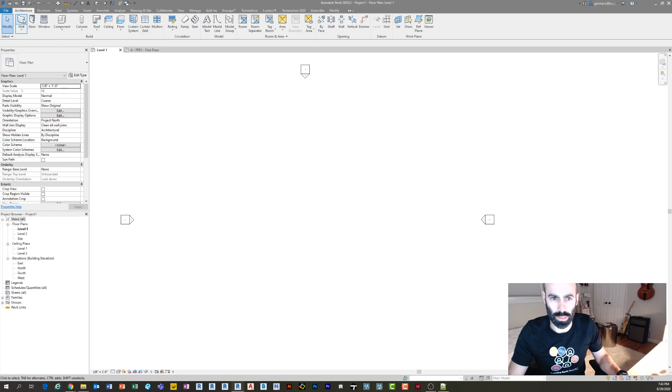I like that question because it brings up a couple other things I can show you guys. For those who have never dealt with corners on curtain walls, this is a cool little tutorial. So I'll quickly go to a default project and click storefront to draw a storefront.

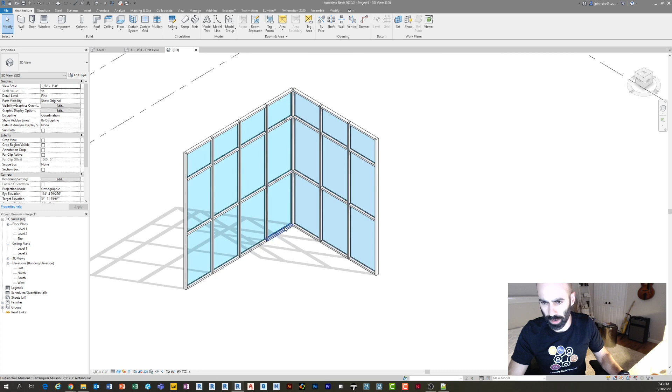Okay, this is a storefront curtain wall right here. If I go in 3D, ta-da! Oh, I have this project with a whole bunch of levels - somebody else asked that question earlier, maybe I'll answer it again here. I'm also going to turn on some view stuff so it looks a little better. Okay, so here's our curtain wall.

Before I jump into the butt glazing, for those who don't know how to put a corner mullion on a curtain wall, here's a great tip. I'll just tab and select one mullion - it doesn't have to be both walls, just one mullion on the corner.

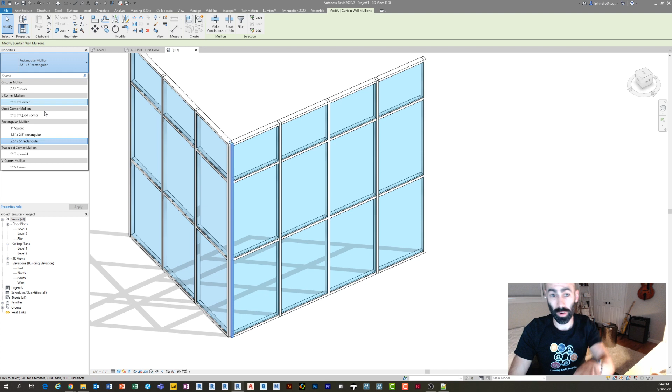Then I right click and say select mullions on the grid line, so now it's selected all the mullions on that curtain wall on that grid line. I'll unpin them by typing UP on my keyboard, then pull down, and you'll notice these things called corner mullions. If you don't have corner mullions, the person who made your template stripped them out, and you have to load them in, which is a bit of a pain. You can see the trapezoid corner mullion, the V corner mullion, and the quad corner - a couple different corner mullions.

If I just do a 5x5, you'll see I get an error in the corner, which you can't see - there it is. Corner mullion overlaps, delete elements. So it's actually going to delete the other mullions and leave just a corner. Say delete elements, and you got yourself a really nice looking corner there.

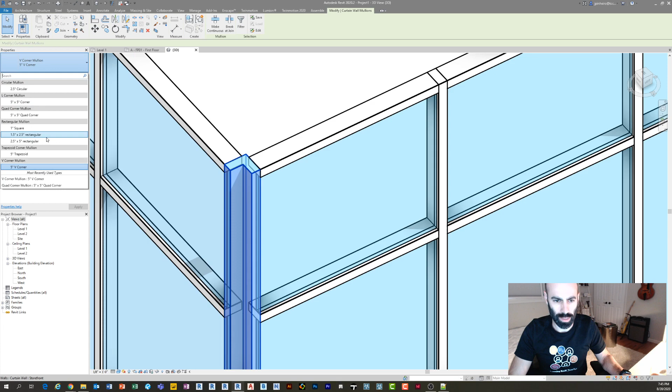If you had a corner mullion, not the butt glazing you're talking about, that's how you'd do it. We could look at some of the other corners so you can get a sense of what they are. I'll select mullions on grid line and do the V corner - the V corner is this guy, and of course I need to select them all. Select mullions on grid line, and a trapezoid corner - look at that thing, that's lovely. Oof, that's a heck of a detail, huh? Yuck.

Okay, so now let's just say we have butt glazing as the question I believe is asking. So I'm going to select all of these, and I'm going to press delete.

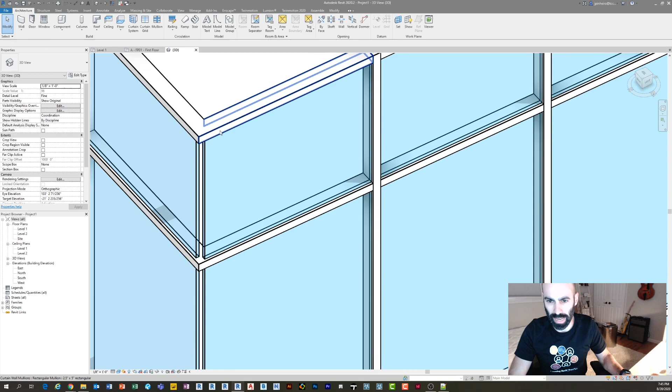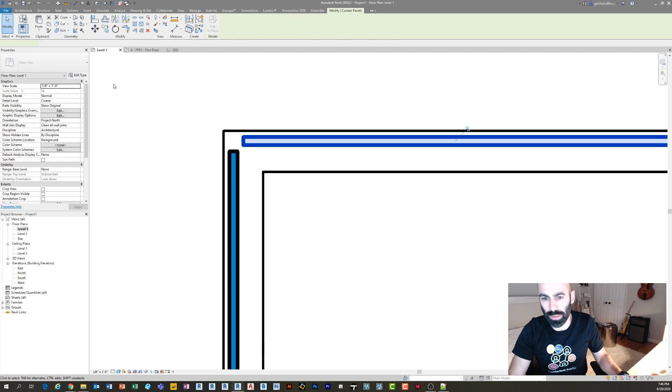So curtain walls, and most walls, but curtain walls especially, clean up using the centers, using the grips that you pull. And so if your curtain glazing is offset, guess what? It's not going to clean up in the middle. So what you need to do is have a type, whether it's the default type or one that you modify, and turn off the offset or modify it.

See how the offset is 1 1/4 inches? If I set it to 0 and click OK, now you can see I'm getting closer. It's not perfect, so if I really wanted to make it perfect, I can dimension here and say my glass is an inch thick, so maybe I want a 1/2 inch offset. There we go. Or vice versa, maybe you want it to be overlapping, whatever, but you get the idea. So I think that probably would be pretty helpful for you. That may be what you're running into, but just a little something there.

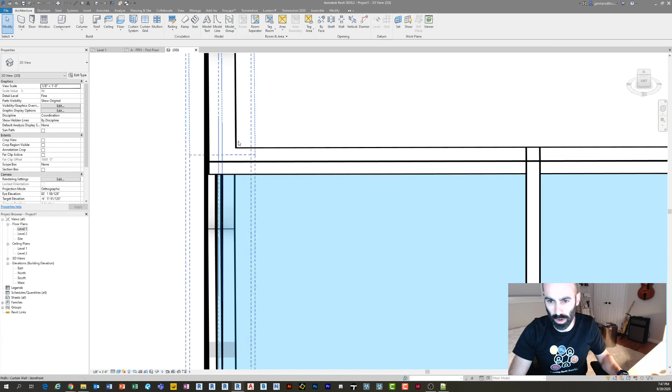And notice how these are cleaning up fine. So if you're using the right mullion types or your default profiles, you shouldn't have any problems with those cleaning up.

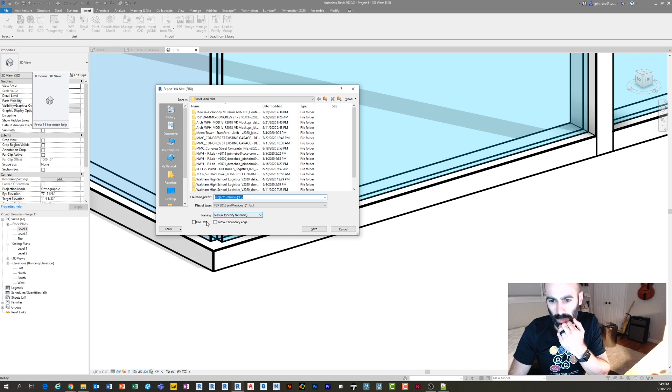The other one works if you go under File, Export - you can see you could do FBX here, and the Autodesk one works, and there are some settings. If you use LOD it kind of helps that out and stuff. But to be completely honest with you, the Twinmotion one, which you can technically install for free even if you don't have Twinmotion, is super simple, but produces some quality stuff coming out of it, and the optimized model.

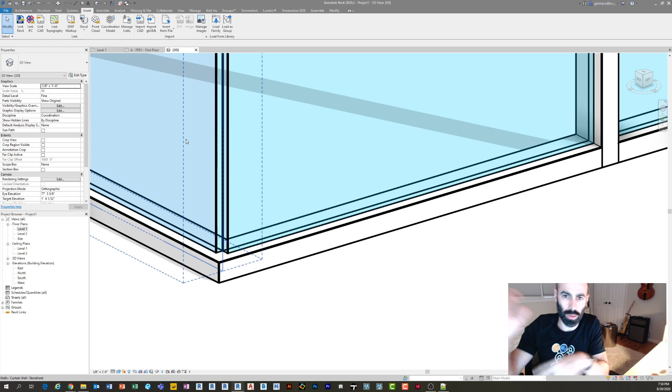Not for every model, I would suggest you check the geometry afterwards. But their optimized model export can greatly reduce the complexity of the geometry, and usually you don't lose a ton of the geometry that you need. So as far as importing, I don't even know if I've ever imported an FBX, to be honest with you. Going back to the Rhino question, if you're not using Rhino inside, the only way to get a .3dm file in is if you go to Import CAD and change it from DWG to .3dm. You can see you can actually change the category and whatnot.

And I do know that there are some best practices people might have for bringing it into an actual family instead. So whether it's a family object outside or whether it's an in-place mass or something like that, there are advantages to that.

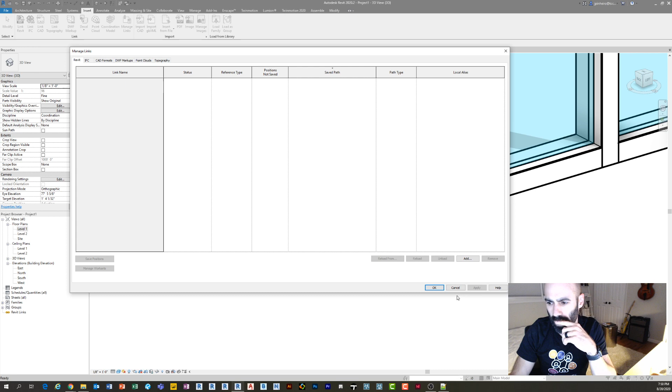I don't even know if I've ever brought in an FBX to Revit. I've got to be honest with you. So if anyone has done it before, let me know. I'm not really sure I ever ran into that. I brought a lot of files into Revit before in the past, but never really an FBX. I've brought FBXs out of Revit plenty of times.

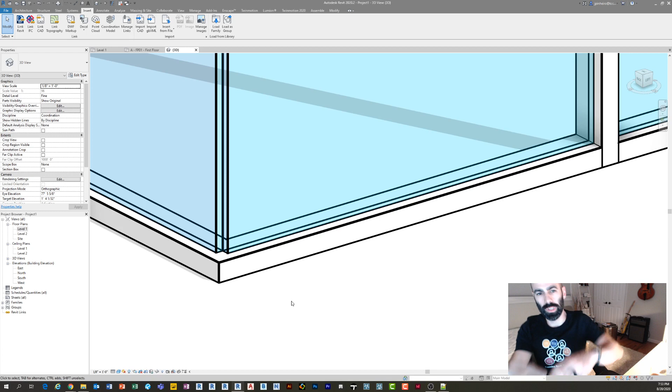And I guess the key here is you may have noticed specific elements, like for example if you've seen Enscape, I guess that's what I can use. If you've seen some of the Enscape library, I actually need to upgrade Enscape, I'm still on 2.7 I think on this machine.

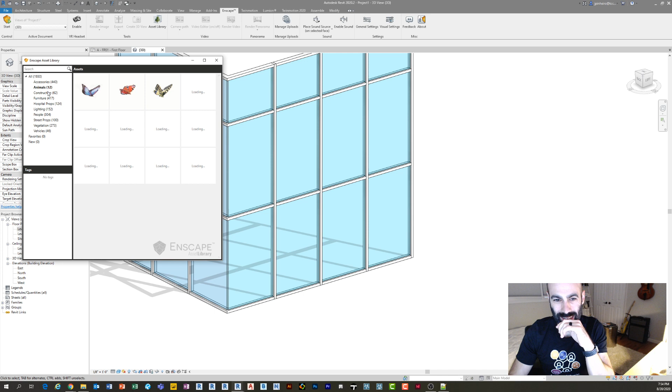So if you were to place, for example... please hold while Enscape loads assets. I'd like to put an asset down, please. While that loads, I'll read what you guys are doing here.

The file size is 1 gig. That's still not bad. It has a lot of fab parts and real-world parts that eat up RAM. Well, I mean, then there's nothing you're going to do about it, other than getting rid of those parts, if you know the geometry is what's doing it.

1 gig isn't that bad for a Revit file size. Yeah, it's big, but if you can't get rid of the geometry, and the geometry is what it is, then your only option is to look for excess things like DWGs, detail and drafting views, because believe it or not, detail and drafting views will eat the life of your computer. Sheets, you know, stuff like that, you can do that.

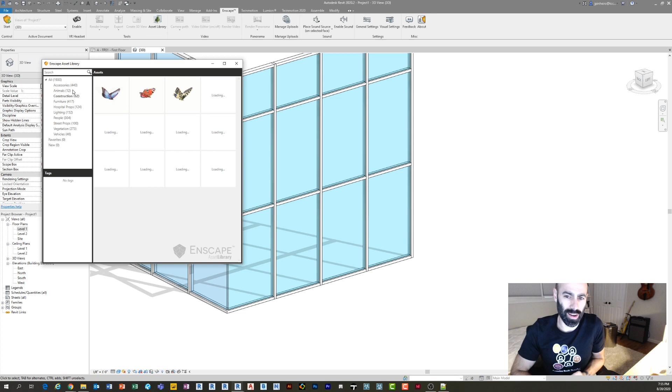But if you need to keep the geometry, alright Enscape, come on now. If you need to keep the geometry, then there's not much you can do about it, other than looking for maybe 1 or 2 pieces of geometry that really suck.

How can I apply a line weight to a text style in Revit? CAD standards approve only some types of text styles, for example RomanS. In AutoCAD, you can do it by layer or with a pen.

Here's another CAD standard. Man, how come I keep getting so many CAD standards in Revit questions?

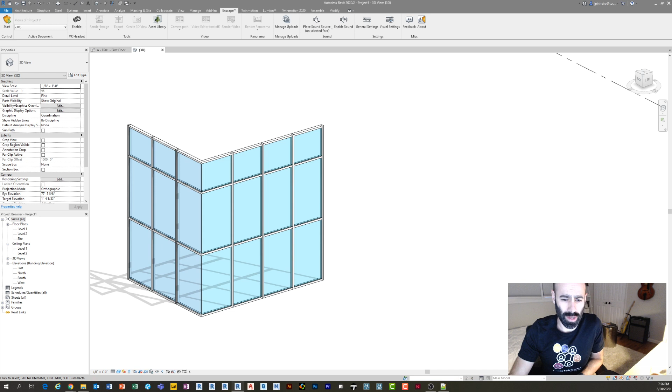So sorry about that. Going back to the whole text style in Revit thing, my first point before I even answer that is stop trying to make Revit look like AutoCAD. Revit is not AutoCAD, nor will it ever be. They're two different programs, and the benefit to using Revit is not trying to make drafted files look like CAD.

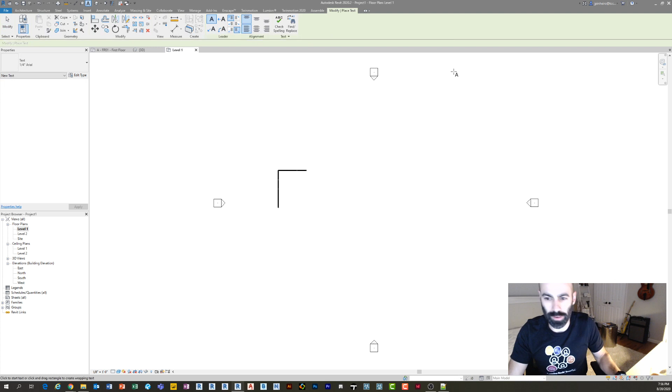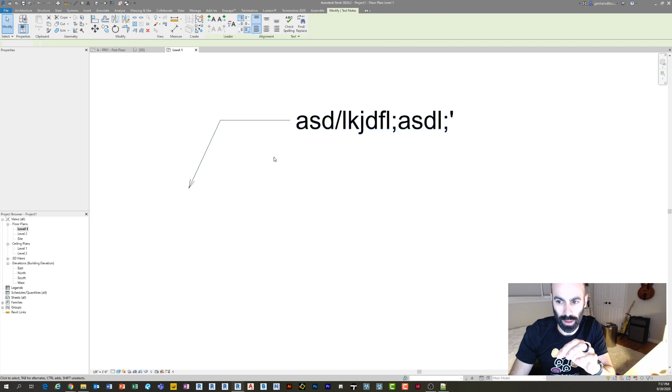All that being said, Revit uses TrueType fonts, so you get what you see. You're not changing the graphics of it. It's not an SHX or whatever those are called in CAD. You're not changing the actual thickness of it unless you bold it or whatnot. It's a TrueType font, so that's just what you have to deal with. Stop trying to make Revit look like AutoCAD. It's not AutoCAD. The sooner you remove all your AutoCAD standards and embrace the benefits of BIM, the better you'll be.

Is there a way to display grids in a 3D view?

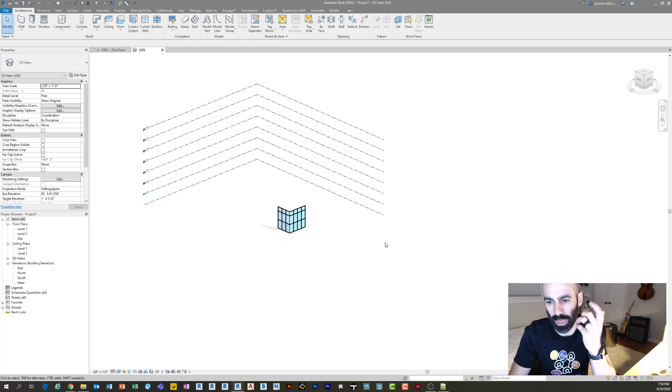Unfortunately, unless you want to use Dynamo or Navisworks, you know, you can show levels, but you'll notice if I go into a 3D view and go down to grids, they're on, but you can't see them. So there are two options: you have Dynamo, and you can bring in a grid family that you create. I actually just did this in a project and it worked perfectly fine.

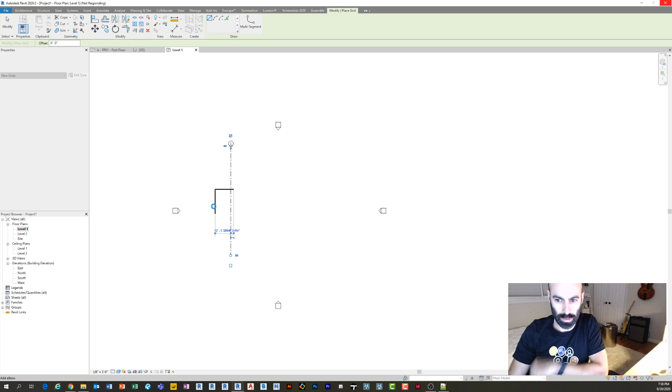If I have some grids in here, so if I do grid 1, uh-oh, I think I just pressed something. Excuse me while my Revit explodes. I think I just pressed F1 about 40 times instead of escape. Let's see, while that goes I'm just going to start reading some questions. By the way, there's a delay between what I'm doing and what I see with you guys. I did press F1 about 100 times. Oh my goodness, okay, there we go. I'm sure we've all been there before.

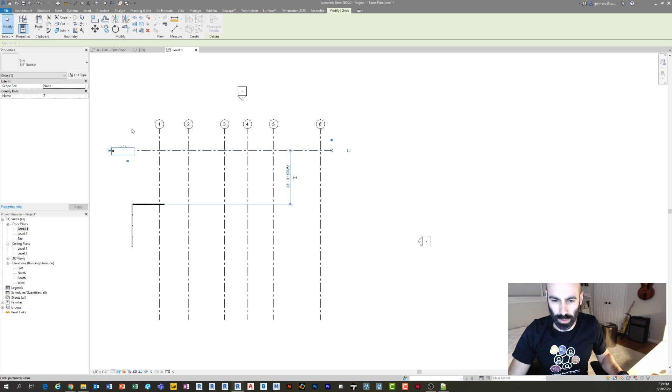Speaking of AutoCAD things that don't go away, the escape button. So if I make a bunch of grids here, and then a few more here, let's call these ones A. Honestly your best bet, if I isolate these, here's my grids, export to AutoCAD. Bring them in. Speaking of AutoCAD, you don't have to ever open it in AutoCAD unless you want to do something with it. If I go here, I export to AutoCAD, I call this one grids.

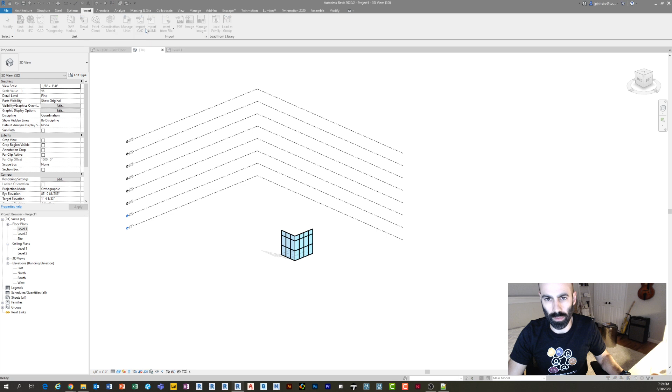Then if you go into your 3D file or 3D view and import from AutoCAD, so insert, import CAD. I know this isn't the greatest answer because if they change them, you have to change them yourself, but it works. The other thing is if you actually want to see the grid numbers, you have to go into AutoCAD and explode them, or export to old AutoCAD. Otherwise, you need to use Dynamo with refresh, which means you're refreshing something anyway, so it doesn't really make a huge difference. Make a grid view, export it, import it in, call it a day.

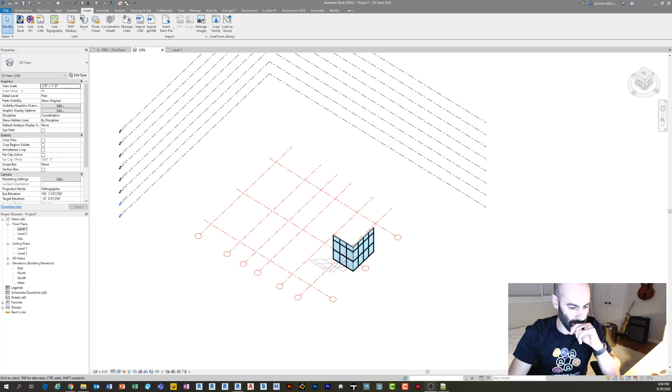There's a lot of stuff going on here. Let's see, what's the best way to import?

Ryan asks, what's the best way to import a topo map of an actual location? If you have a CAD file, it's one thing, but it sounds like you're saying without a CAD file.

I have a tutorial from many years ago on the easiest way to make topo from an image. I'll post that here so you guys can check it out. I just posted it in the chat. It's actually one of the most viewed videos on YouTube for me, which is kind of cool. It's been there for a while.

What are the best methods to model light gauge framing? Ooh, that's a pretty good question. All right, let's do this.

Light gauge framing can be very similar to wood stud or wood framing. After my last tutorial, if you didn't see it, check it out. I think I posted it on Monday, where I was showing how to put X's in stud walls. I got a few questions about the framing of this project, so I had it open. I was also chatting with Tom, who's a member on our site. Let me go to 3D views.

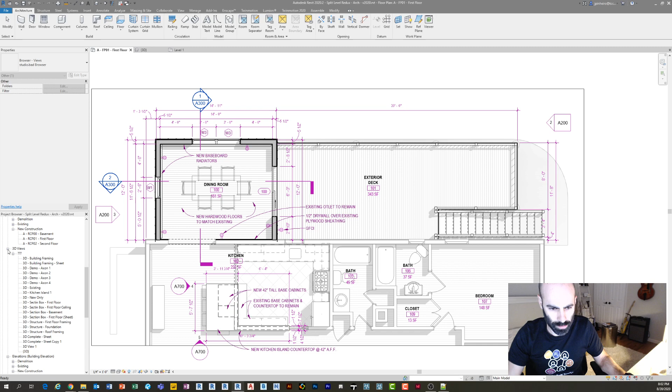This isn't cold form, but not too different from cold form. Imagine these are actually just C channels. Let me turn off walls so you can really see it, and roofs. So you can see I have cold form or stud framing here.

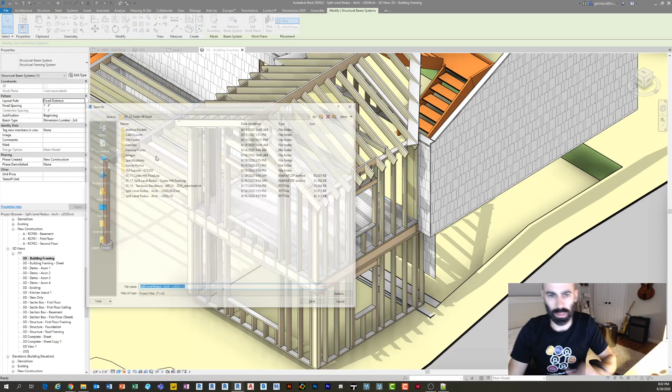The way this is done is mostly beam systems. There are some little techniques you could do - I should probably save as this so I don't overwrite my actual project. Let me just, sorry about that. Beam systems are probably the easiest way, but they are a little bit of a pain in the butt to update.

Over time, you could host them and make them parametric. But then things like headers and little sills and stuff like that are kind of manually drawn in. I can quickly show you how you can approach that on this file here. I would hope you guys know how beam systems work, but if not, check it out, just Google it, it's pretty easy.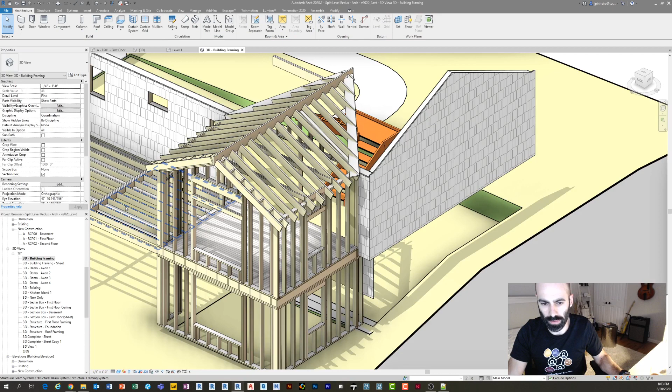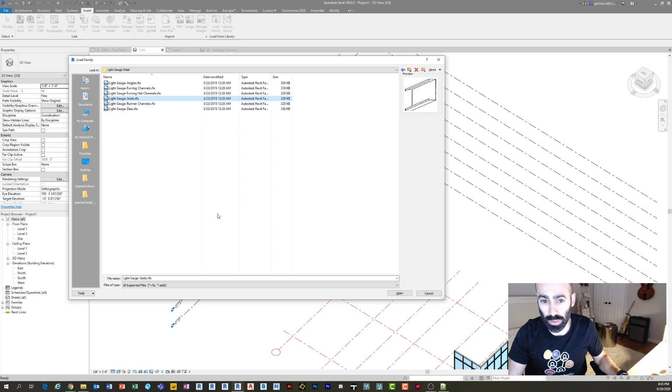Beam systems themselves are pretty straightforward. So in this file, as a default, since you said cold form, I'll load in some cold form framing - structural framing, light gauge steel. We'll do some light gauge joists, and we'll do some 4-inch joists. Sure, 4, 5s, whatever, 6, sure. Doesn't really matter.

Framing itself - if you go under the structural tab and go to beam systems, it's really cool. You basically just set up a floor profile, or you can host it on multiple things, which is what I'm going to show you, and then you just set the spacing. So I did beam system, and you can see I'm drawing my floor here. Then I just set a direction.

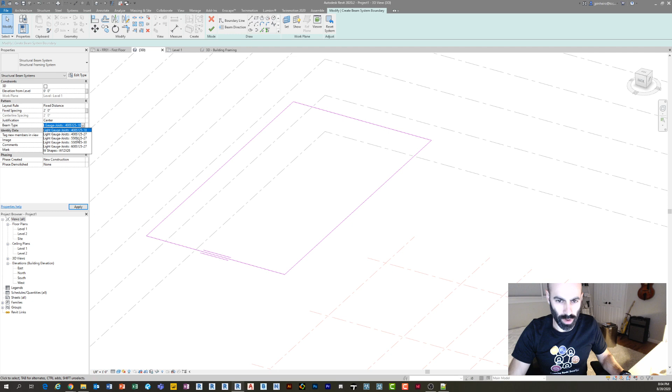If I click beam direction, I can change the direction of the beams, either direction, right? Then here I can set my spacing. Right now it's set to 2 feet. If I want it to be 24 inches, I can. You can also set your beam type, so light gauge for whatever. If I want it to be a 400S, click apply and click finish. Just like that, you can see I have a system, okay?

Now what's cool about these systems is they are parametric. So if I edit it just like a floor, it's good. You can also lock these to floors so they are parametric. But also if you wanted to put an opening in this floor, for example, I can just do this, right? And there it is.

But then when it comes to the individual beams - for example, there's an opening there, I'd probably need some sort of a header. You have a couple options.

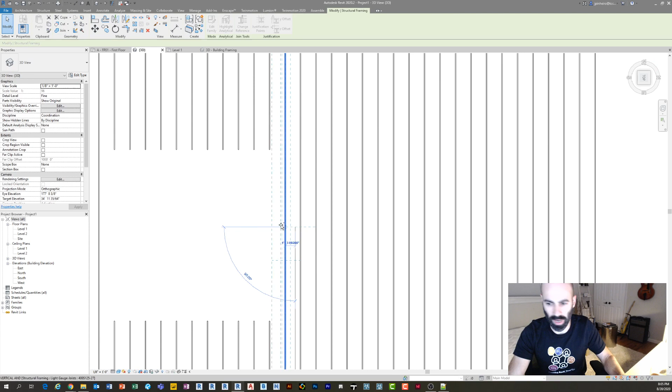If they're in the same direction as the actual framing, a lot of times because it's already hosted, I'll take one of these frames and copy them, and then you can do whatever you want with it. You can change the edges, you can change the sizes, and so on. But if it's not in the direction, you can just draw structural beams, same size, and draw them across here like this, and then across here like this. You can move around, do whatever you want.

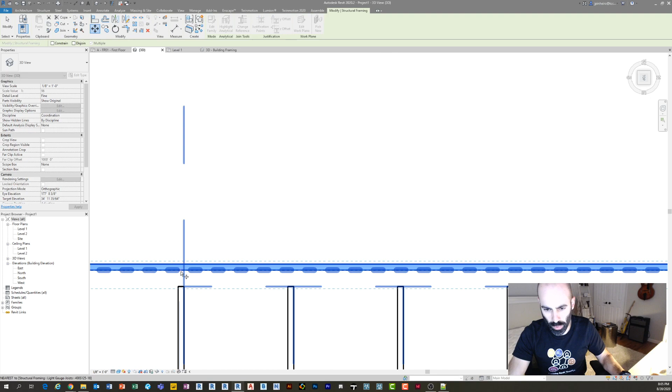Okay, so that's a quick way to do that. But now let's say we want it to be on a roof, for example, which a lot of light gauge framing usually would be. So what you're actually most likely going to need is your roof there first.

So what I'm going to do is draw a quick roof. I know I'm doing all this in one file, so it's kind of goofy, but I think you guys get the point. I'm trying to get through it all so I can get to a bunch of your questions, and I apologize if I don't get to everyone's tonight, but the questions came in fast and furious.

It was pretty awesome. Okay, so what I did here is I just made a quick gabled roof. So what I need to do is create a new beam system. If I go into structure, beam system, or just click beam system and type CS for create similar, I can click set for my work plane, which you can also do under architecture or under modify.

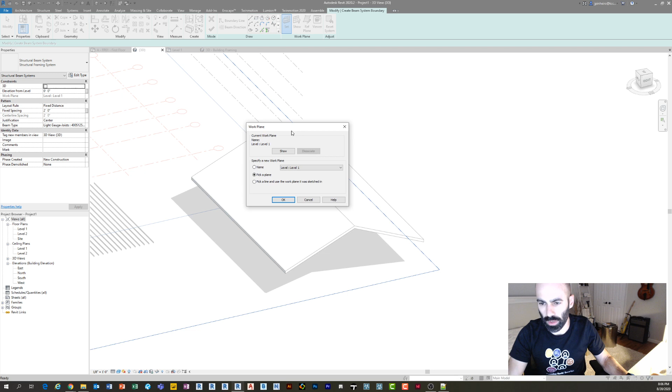If you click set, you can actually pick a work plane. By default we were drawing on level 1, but we want to set it on a work plane, which is going to be our roof. If I click pick plane and select the top or bottom of my roof, I'm going to click the bottom. Now I'm drawing on that roof slope.

So all I have to do is click pick lines, tab to pick my lines. I'm going to keep this at 2 feet, finish, finish, finish. And now if I hide this, you'll notice I have roof framing in that direction.

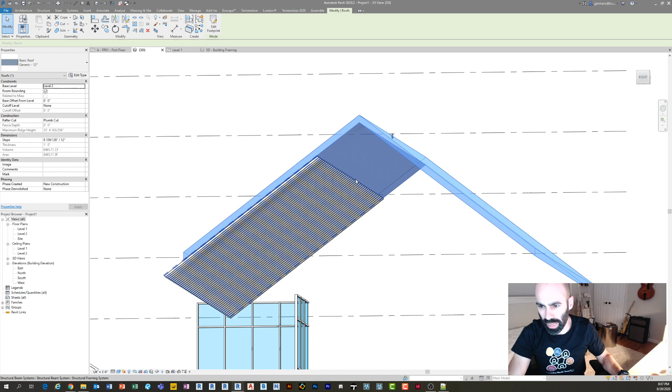And because it's hosted, notice this, if I change the roof pitch, it changes with the pitch, but I didn't lock the actual sketch, so it doesn't change the height or the length. So that's what I mean by it's semi-parametric.

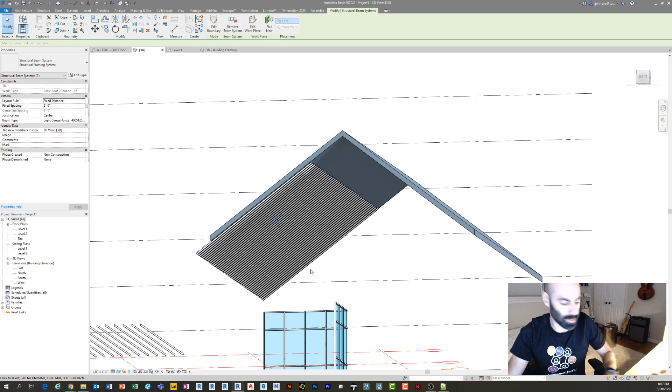You have to—unless you plan for it—I just hit F1 again, man. I haven't hit F1 like that in a long time. It's great, but you have to be ready to play with how these things react to the building changing. And then finally, walls.

So what I did for those stud walls is, if I hit a stud wall here, do the same thing. You do a beam system, click set, pick a plane. I'm just going to pick the face of this wall for now. Click finish—oops, I need to actually draw a beam.

Let's draw some beam systems. I'm just tabbing around and selecting. I'm going to do my beam direction like this, and click finish. And now you can see I actually have my studs inside the wall there. If I hide them, you can see there's the studs there, which is pretty cool.

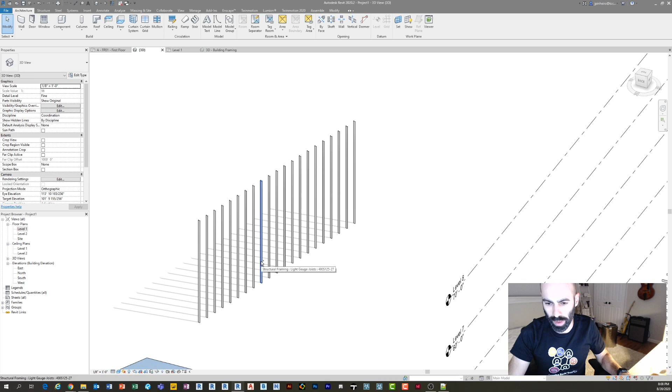And then I'll show you just quickly how I would make—I just hit that, didn't I? Yeah. If I was to now put a window in this wall, let's put a window in the wall. Let's probably make it a little bigger so that we can do something with it. Let's make it a 5-foot window.

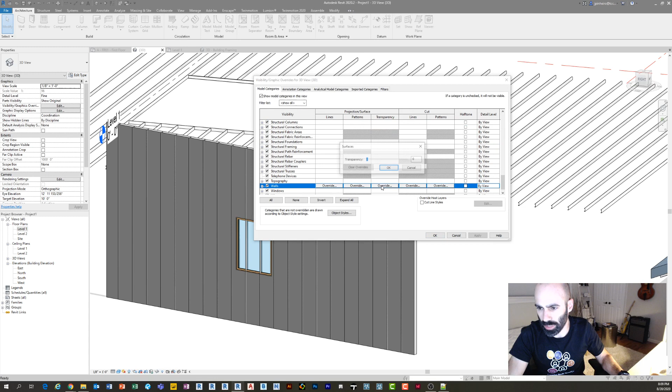Okay, so now that I have a window in here, what I can do is modify this beam system a little bit. For example, I'm going to go under visibility graphics and make my walls a little transparent, like 50% transparency, so I can see my beam system. Ta-da!

I'm going to look straight at it. Of course, I didn't draw it straight, so that doesn't work. I probably should have drawn it straight. Sorry about that. Let's take all of this and rotate it so it's straight, because drawing anything on an angle in Revit sucks. Okay, now I'm looking at it straight.

Now you can start modifying this however you need. For example, if I'm just copying these beam systems, since they're hosted already and in the right plane, I'm starting to make my king posts. You could...

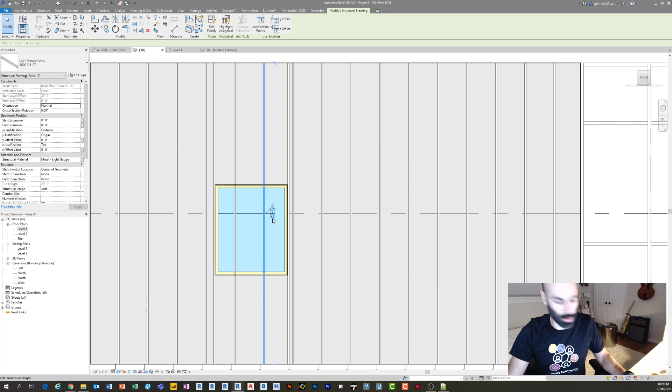Copy and rotate these as well if you want. For example, if I copy this guy and rotate it 90 degrees, you can see it rotated, but unfortunately it also rotated in the x-axis, which isn't necessarily the worst thing based on this framing. Then you can start filling in the gaps.

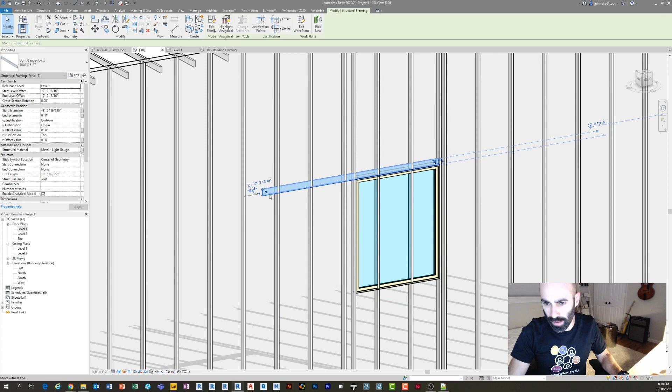But again, the problem is that it's a pain to update, so that's extremely important. I can also unpin these. Unpin, and I can split them. SL on the keyboard is split, by the way. Then I can quickly frame out this opening.

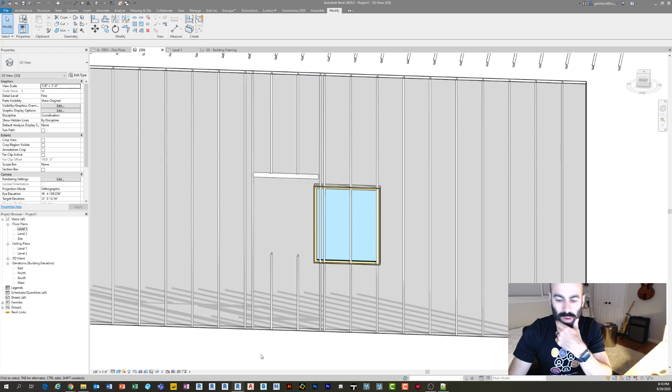But as you can see, now that I have this opening framed, unless I spend the time to lock this stuff to the opening, when I do this, guess what? The framing stays. So be wary, unless you use a plugin like Strucsoft MWF framing or a few other framing plugins out there, or take a different approach, you're going to have to modify things like that. Obviously I could have just made openings in the beam system to avoid the split, but yeah.

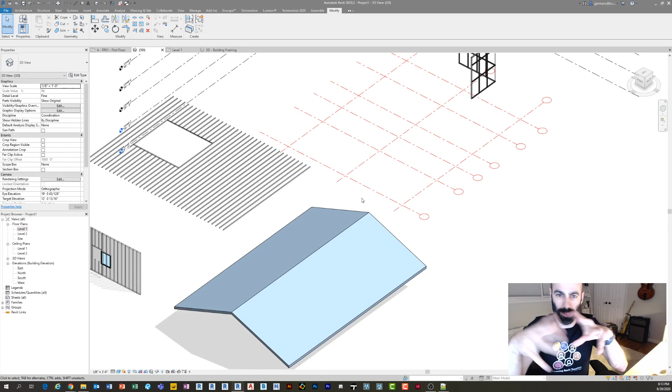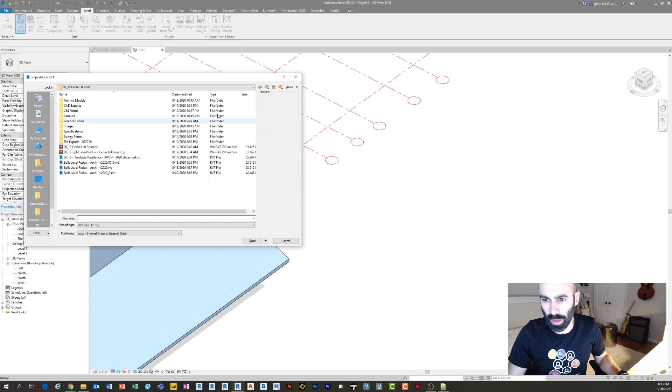Okay, what was I talking about? Links. Okay, so if I bring in a linked file, if I link Revit and grab this file here, I bring in that residential house file that I was showing you before. So you can see this is now in the project, and there are rooms in this file.

So if I go in here, you'll see if I go to tag rooms... if I click here, you can see there are rooms in this file, 102, kitchen, etc. The way that you can monitor those is you can just make a schedule. So I'm going to go to new schedules and quantities, and I can make a room schedule.

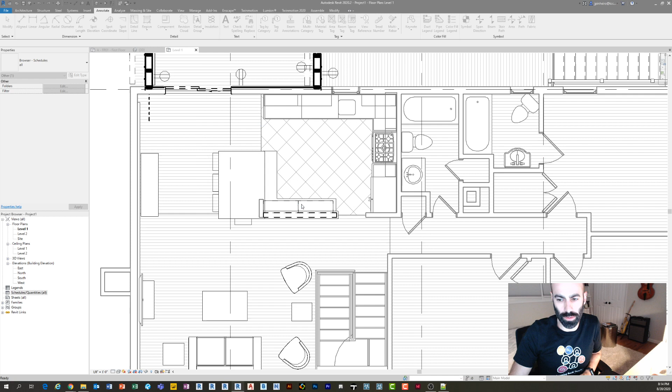And I'll do name, number, and area. The key here is just selecting include linked elements in links. See right here? Include elements in links. Hopefully you guys can see that.

So now if I do that, you'll notice I'm actually getting the rooms from my linked file. So that's one way to monitor them. If you want those parameters and that information to exist in your live model, then you're going to have to use something like Dynamo to do it.

Steve asked, how would you add plants to a wood trellis? Enscape had some vines to put on the walls, but it did not work to put them on a trellis. Not really sure. If they have vines, I would show you, but for some reason, maybe because I haven't upgraded to 2.8 yet, my Enscape asset library isn't loading right now. But the assets in Enscape are usually just work plane based, so you should be able to just move it and adjust it onto whatever trellis you're talking about.

Sorry if I don't really know what the real question is there. Sorry, I was just in the background cleaning up some of the Revit files that I had open.

Any tricks for copying view links from a master file to a working project? View links, any tricks? I'm not sure what you mean by view links. Are you talking about view templates and view settings? Chow, or Chow, I hope I pronounced it right, please try and verify that a little bit. I'm not really sure what you mean by view links.

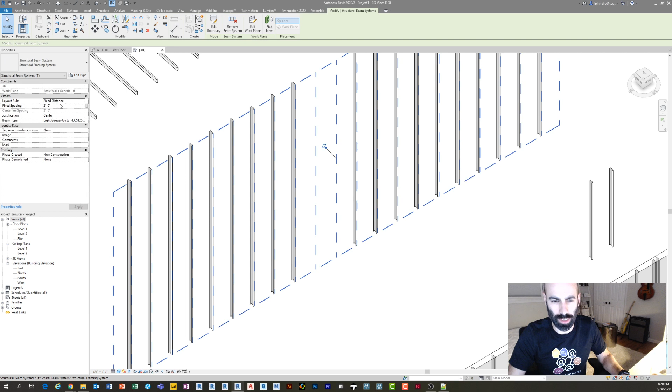So what I did here is I took the beam system and carried it over here. So I just copied this beam system from the wall and loaded in a hat channel. And then what I'm going to do is change the distance of this to 3.5 inches. Granted, if you were using a Butler building, it may be like 18 inches, and that's what the channel looks like. And then I'm going to flip this thing to a hat channel, click apply.

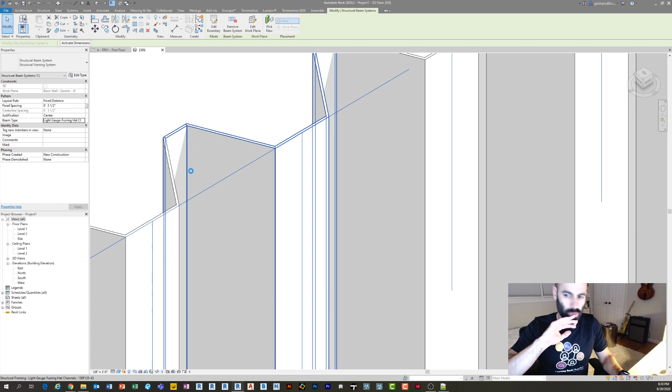And now if I zoom in, you can see what this looks like, if Revit doesn't explode. Revit is not behaving tonight.

That was a cool question, actually. I've done a few Butler buildings, but never had to — I've modeled trusses and stuff for them, but never tried modeling the exterior wall beyond just putting line work on it. All right, well, Revit might blow up, but hopefully you got to see it before Revit blows up.

All right, let me check some text while that's going. Sorry that I was talking again without showing the screen, it happens all the time. That was Jose who asked that question. Thanks for the question, Jose, that's a great question.

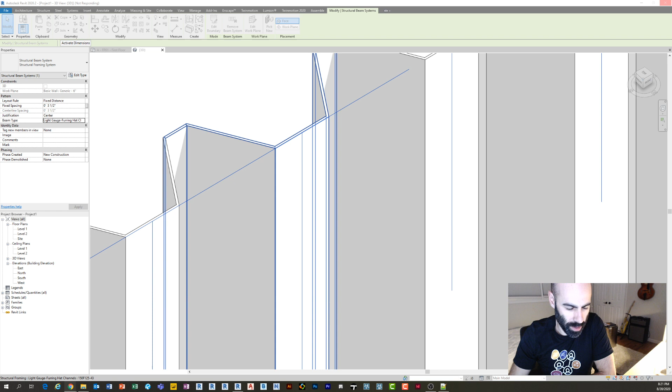People are complaining about talking about fonts. I definitely don't want to... weird.

Okay, looks like we're back. So hopefully you guys can see this, and you can see this is just a beam system with repetitive elements. Ideally this hat channel would essentially be your Butler building wall that you're talking about, and you can use that. For this case, you may want to use something like a curtain wall, just because it acts more like a wall and you can stretch and pull it without modifying it. And then you can use the mullions as your quote-unquote Butler stuff. Hopefully that's helpful there.

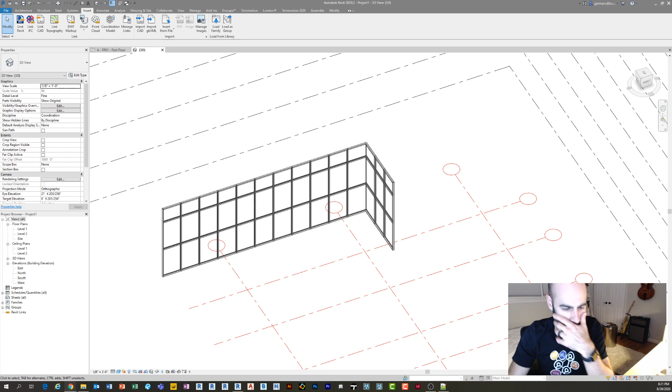Cool question, man, appreciate it. All right, let's go back to camera. I can't forget to go back to screen when I show you guys stuff.

Is there a way to get scaled views from Enscape, Shane? Not really. I mean, you could put something in the view that's scaled, but Enscape views are perspectives, and they do have an orthogonal thing, but you can't really put a scale on it. I would say if you really wanted to scale an Enscape view, just put something in the scene that you know the size of, whether it's a square, a cube, or maybe a piece of furniture, and then use that, and you know what the size is. The reality is you can't really scale perspective, but you can scale the orthogonal views, which they do have now.

Let's see. Brody, there's quite a conversation going on about fonts, so I love that. I geek out on fonts too.

Separate file for grids and levels, and then simply link in the file to the rest. Yeah, so depending on your project, actually that's a good point, Brody, thanks for saying that. There are a lot of people who do create a grids and levels file, and that works for them — they link it into all their stuff.

Any workaround for viewing railings and RCP views? Buck Davis, thanks for joining. I'm not really sure what you mean, let me show screen here.

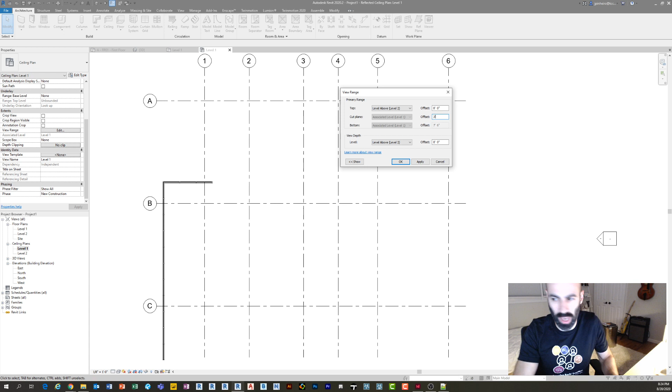Okay, so if I was to put a railing, you may be meaning a railing on the stairs, so we'll start with a railing here. So here's my railing, which if I go in 3D, there's my railing. Now here's the thing: if you were to go to the RCP of this, you're not going to see it, because your cut plane is at 7'6". Well, guess what — your railing is only 3'6" tall. So if you wanted to cut your thing lower, it still isn't showing the railing.

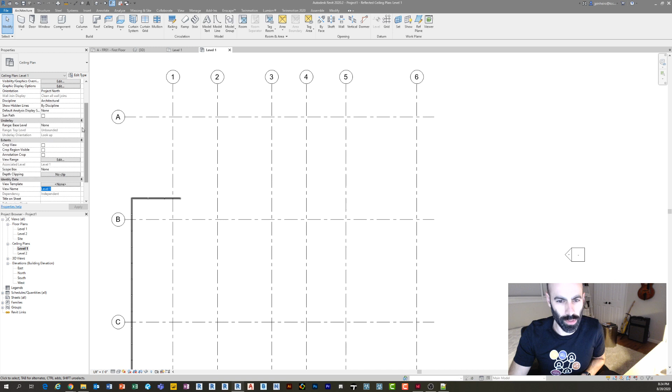I've never even noticed that before. Okay, maybe you can't see them. Has anyone thought of a way to see railings in RCPs?

Actually, that's kind of the way I was going to think. A lot of times with RCPs, I probably didn't go low enough depending on this railing—sorry, I should have checked that. Your cut plane is at 7'6", so you can play with that.

A lot of times with reflected ceiling plans, I'll actually play with some of the new underlay tools because they are really powerful. You can look up or down at different levels, and that makes it really powerful. So what I just did there is set my range-based underlay to level 1, looking up at level 2.

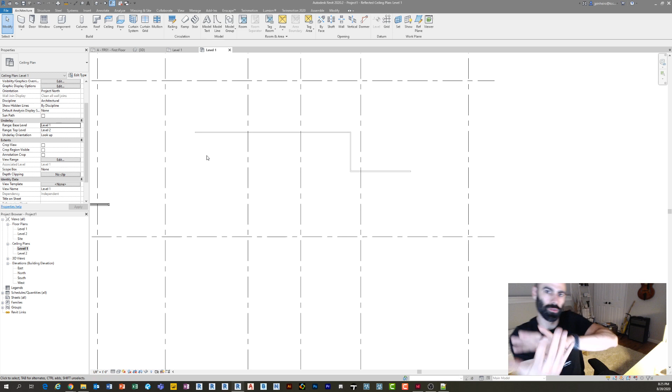So then you're doing this goofy half-tone thing and showing stuff, but it just gives you another option for tweaking with reflected ceiling plans. I don't know if that fully answered your question, but that's one of the ways I've messed with some of that.

Hello from Brazil, what's up?

LJ Lancaster said, still love the look of that model. Is it shaded view with override graphics to play with transparency?

Yes, so that's actually what's called my 70-50-20 rule. I'll post a link—I get into all of the little view settings in an episode a couple weeks ago. I just posted the link in the chat, and that's my 70-50-20 rule, which is basically a couple of graphic settings in shaded. I did have transparency on the walls for that framing view you guys were looking at.

Hello from Russia. Hey. Looks like the chat's slowing down, so I'm catching up finally. Woohoo!

Tried a few Dynamo scripts for syncing linked model data, and it doesn't quite work. Would love to see your thoughts for just doing it with the room name and number. So Alan's still asking about the linked stuff.

I think you saw what I was doing with the rooms using linked files, and I do have some scripts that pull data from linked files. You'll usually have to use—I think there's some custom packages that let you select linked elements—but it shouldn't be a problem.

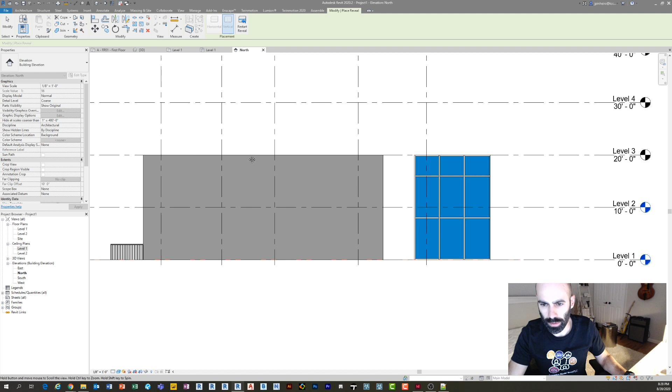Okay, so if I was to draw a generic 8-inch wall here—I don't even know where I am in this wall, there it is—and then I do a wall reveal, let's say vertical, for example. And then maybe I just copy this a few spaces.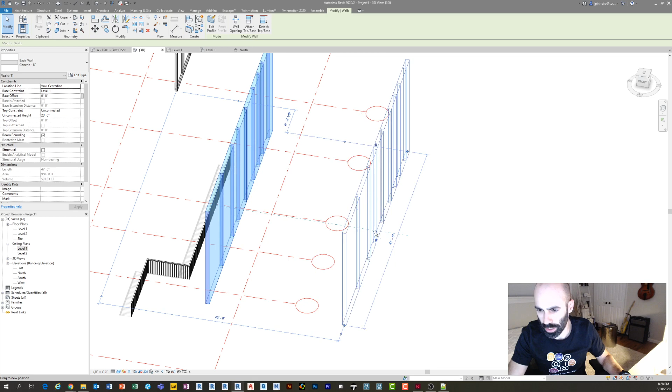Okay, so you can see there's my reveals. If I go in 3D, this file is getting a little much here. All right, I have to turn my wall transparency off. Clear overrides. Okay. Apply. Okay.

All right, so you can see there's my reveals. I guess these are a little bigger than probably the ones that you'll be making. So if you want, I will make them a little thinner.

So I'm just going to go down to families, profiles, rectangular—where am I?—reveal brick course.

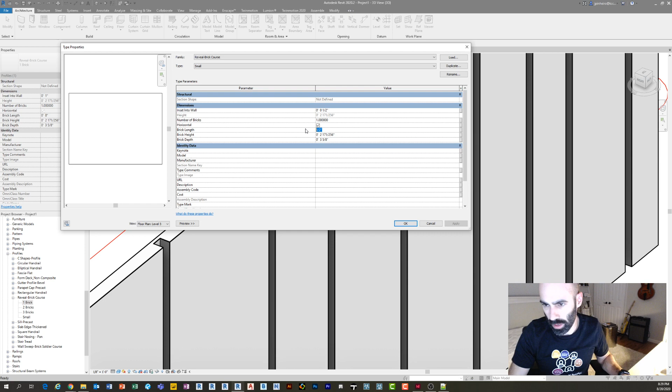Let's just use this one for now. I'm going to take the one brick and duplicate it, calling it small reveal. The inset into wall is going to be 1/2 inch, and for the brick, let's just do 1/2 inch, 1/2 inch, 1/2 inch, or whatever.

And then I'm going to select all of these and flip them to the brick, the one I just made, which is called small.

Okay, so now unfortunately, these are edges of walls, so here you can see they're looking a little thick. And if I go to my floor plan, you can see there they're looking a little thick too.

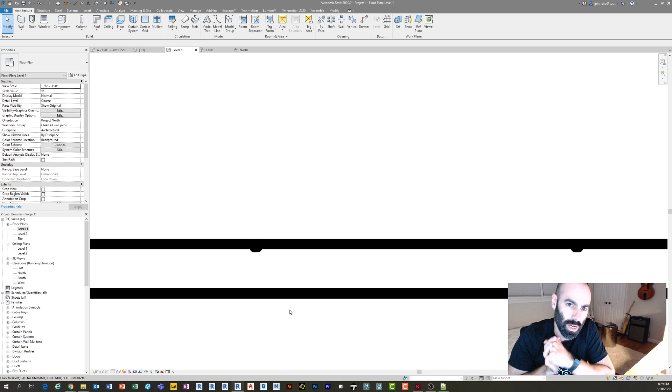Unfortunately, there's not really much more you can do about that, mainly because they're just cut in the walls. So in theory, if you tried tweaking some line weights, you could mess with it, but the reality is there's not much more you can do because it is what it is—you're cutting the wall and you're seeing them.

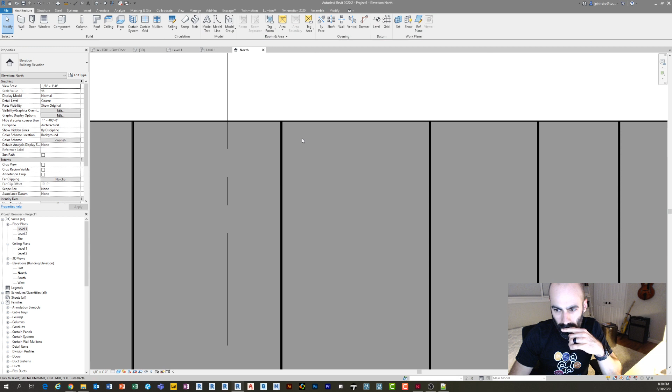If you wanted to, in your elevation view, for example, let me go back to elevation view. You could use the linework tool, LW on your keyboard, select, and use thin lines on these—that's one way. I don't think hiding the reveal will do anything, but you can see line weights kind of does it there.

Otherwise, there's not really much more you can do. The opposite is you could make your line weights of your walls in that view thin, and then click the edges and make them thick, if that makes sense. So hopefully that was a little helpful.

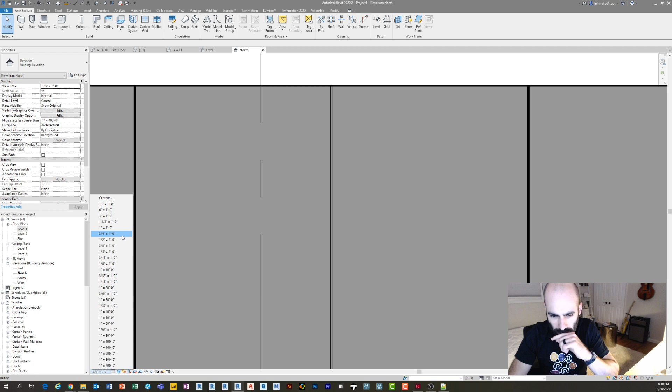That's kind of a tough one. But you can see even here, even at 1/8 inch—if I go to 1/4 inch, oops, not 1/8—you can see the difference between this one and this one using the linework tool. Unfortunately, the only way to do that is to manually click the edges, which is a little bit of a pain in the butt.

How do you export schedules to Excel? Oh, super simple.

Actually, if you're interested, a couple weeks ago or maybe more, I did a live show about Power BI. And granted it was about Power BI, but I did talk about exporting from Revit quite a bit, so I just posted that in the chat. But I'll show you really quickly.

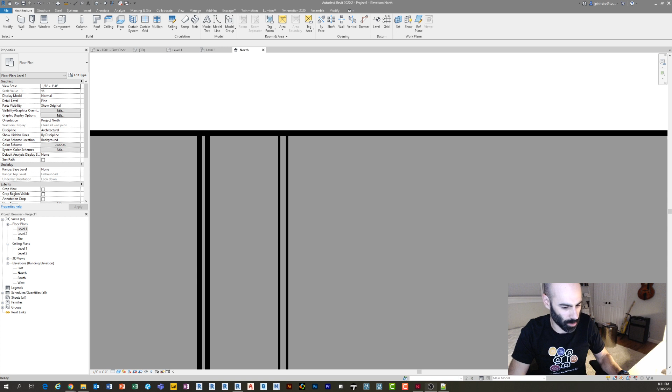If you remember, I made this schedule here, room schedule—oh, I forgot to put the link back in there, darn. All right, let's make a new schedule, let's make a wall schedule or something. So if I go to schedules and go to walls, I'll just make a wall schedule, put a bunch of information in. Fine, okay, so there's my walls.

Super simple, all you do is go to File, Export, Reports, and Schedule. You could make a keyboard shortcut for this—that's what I found out during the Power BI thing, I didn't even think about it. And so you can see mine is SCX because it is quite a few clicks.

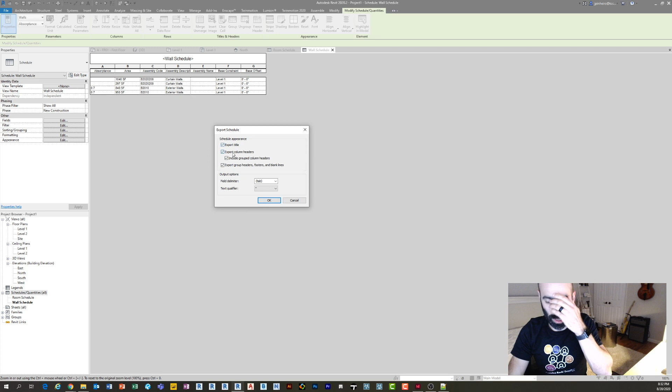But if you go to Reports and Schedule, what it does is make what's called a TXT file, which is a CSV file. I know it's confusing, but you're just going to export this to a location, leave everything as is, and click OK. So now it creates a text file, and then in Excel, if Excel wants to open, it's opening on the other screen.

Hold on a second, guys. Oh, it's 8:30 already, man, time flies when you're answering questions.

This is pretty cool, I think I'm actually getting to the end of the list of questions, which is pretty awesome. So if I create a blank workbook in Excel, I go to Data, From Text, and click that file, which is called wall schedule, and click import—all I've got to do is click finish and okay, and there it is.

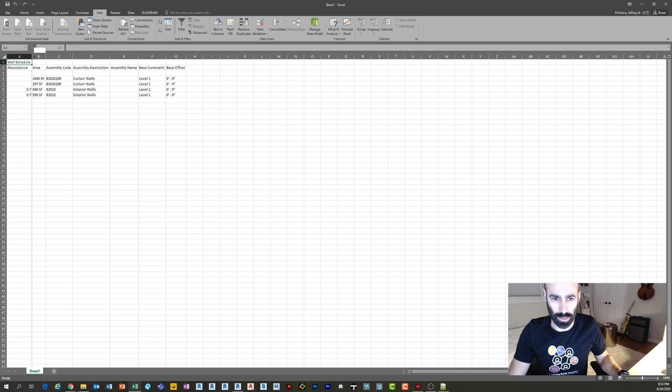If you wanted to, you can look into Dynamo or PyRevit, or there are some add-ins that let you automatically go directly into Excel, but that's pretty much it. You export to a TXT, then import the data into Excel, and you got yourself a Revit file in Excel.

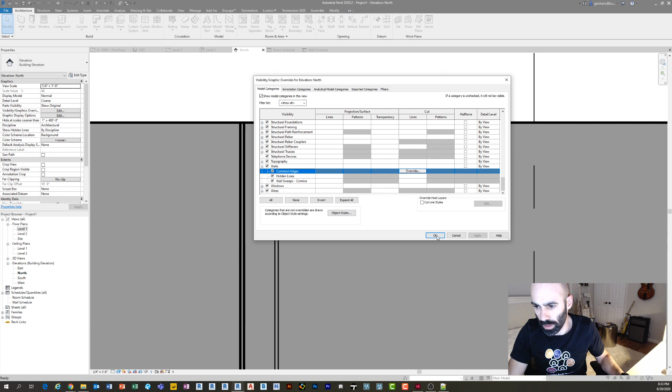Line type tool—yeah, David said he's using the line type tool. Unfortunately, because you're using reveals, you're kind of stuck with the wall category, and there's not too much you can do beyond the actual line type, line work. Sorry, I don't know, some kind of bang outside.

I'm hoping that I don't lose my power again. For those of you who were looking out for the show last week, I apologize for postponing it, but I was out of power for 7 days and internet for 9 days, so it wasn't fun, I could tell you that. All right, we got a couple more questions and then we're gonna wrap it up.

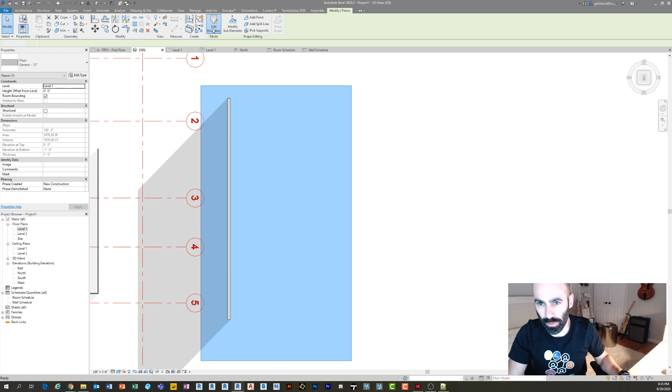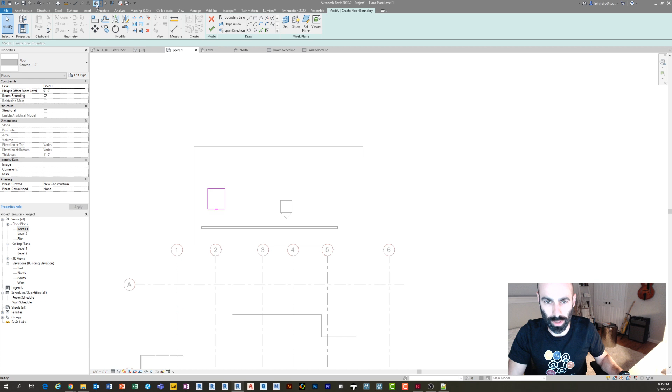Here's my floor. Now what you can do is make a floor within the floor to make your life a lot easier, but you can also do it within the grander floor. Let's do it two ways. First, I'm going to make an opening here, then create a floor. My work plane was set to the roof or something, so whatever - I'm going to make a floor within a floor.

With this, you can modify the sub elements and place a point in the middle - let's say it's in the middle, I don't know if it actually is, but I'm just saying that - and then you set it to -4 inches, and now you've got yourself a sloped floor.

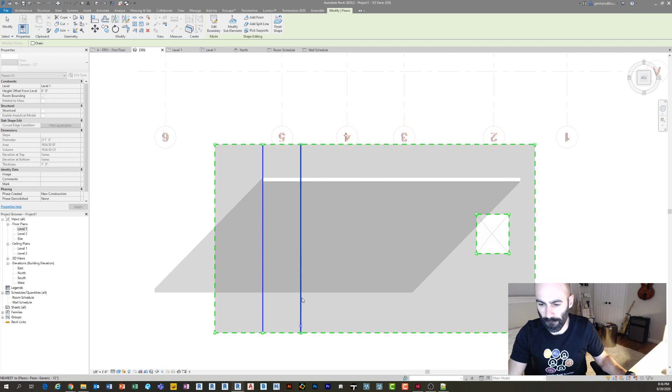Or if you didn't want to do a floor within a floor, you can do modify sub elements, which requires a few sketches. For example, if I add a split line here and a split line here - split lines have to go all the way through, so that's why I'm doing that, it'll be cleaner that way - then another split line here, I can put a point in the middle and grab it and set it to -4 inches, and there you go.

So there are different ways to approach the same thing, but I'd lean toward this method because you're not messing with the original geometry, which can be detrimental. So what I did was select the floor and go to modify sub elements - if you're not familiar with that, floors let you do some really cool, crazy stuff.

Beth Ann, hey Beth, nice to see you again.

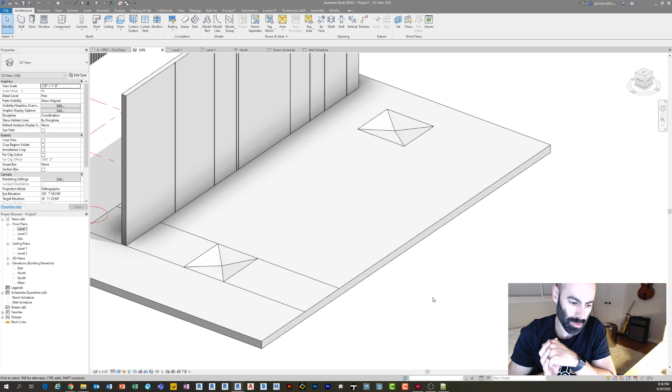What are the best recommendations for add-ons and supplemental programs to produce renderings for a firm just getting started? I have an entire series and course about that, plus a bunch of episodes. I'd say Enscape, Twinmotion, or Lumion. If you go to RevitKid.com and check out my videos, there are episodes of this exact live show where I run through them all with reviews based on what I think. Depending on your circumstances it may differ, but those three are probably where you want to go. I even have an episode comparing all three. So depending on your end goal and budget, those are the three I'd look into - Enscape, Lumion, and Twinmotion.